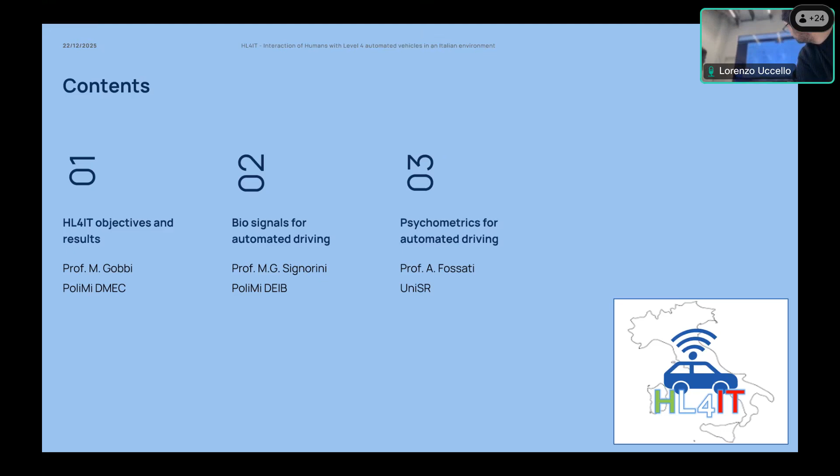First of all, the team. In this slide, you see all the people involved in this research project. There is one team from the Department of Mechanical Engineering. I'm not citing the names, but you can see all the names in the slides. Then another team from the Department of Electronics, Information and Bioengineering. And last but not least, the team from Università Vita-Salute San Raffaele, led by Professor Fossati.

Actually, almost all the activities have been conducted at the DriSMi lab, so at the dynamic driving simulator at Politecnico di Milano, with the contribution of Francesco and Paolo. I want to mention, this is the short list. Actually, there was also a quite large set of master students involved in the project, which are not listed here.

The focus of the project is obviously safety. Actually, the focus is on acceptance of automated vehicles with, again, another special focus on a peculiar environment, which is the Italian environment, that has some specific aspects related to roads, traffic, and so on. In my portion of the presentation, I give you a short overview on why reasoning on automated vehicles, what is an operational design domain, what is a takeover maneuver.

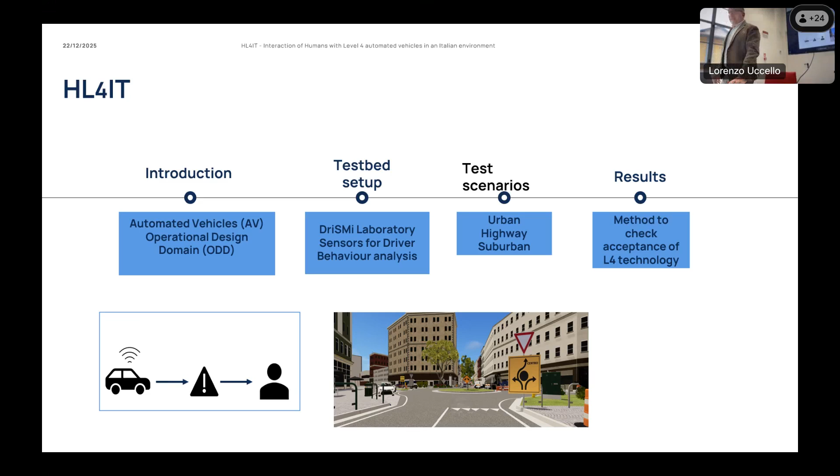Then I'll describe the setup that has been used both in terms of scenarios developed at the driving simulator and in terms of sensors and subjective measures that have been developed by the psychometrics. I'll get at the end with a few slides on the method that we have developed to check the acceptance of L4 vehicles and some results.

So the focus was to develop a standardized, rigorous approach for assessing the acceptance of this L4 vehicle. So we have been able to define how to measure, by resorting to a driving simulator, the level of acceptance referring to a sample of drivers. Actually, I must emphasize that the approach, the procedure that we have developed is actually applicable also to different technologies in which I have to consider the human within the machine, the interaction between the human and the machine. I will give you more details later.

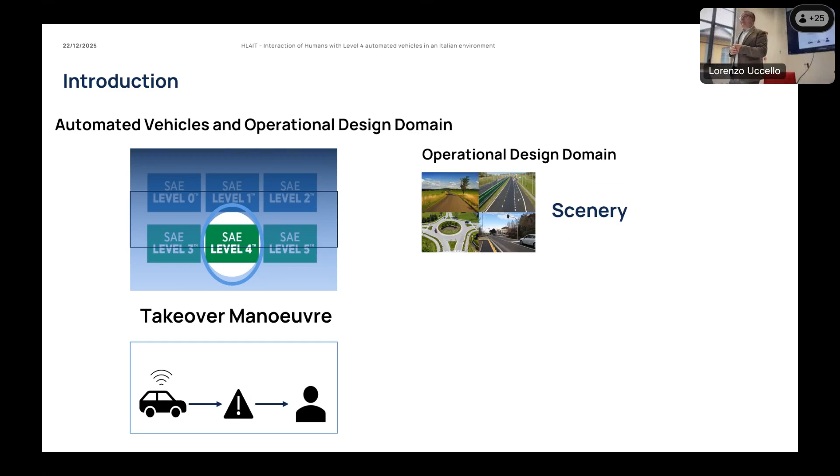Automated vehicles, SAE level 4 is the focus of this project. The dynamic driving situation is defined for a level 4 vehicle within an operational design domain. The operational design domain will be defined at the driving simulator by describing the scene, by describing all the environmental conditions, and obviously, this is particularly important for the Italian scenario, all the dynamic elements of traffic and the particular situations which have to be considered.

If we get to a situation in which we reach the limit of the operational design domain, the vehicle can require a takeover maneuver, so giving back the control to the actual driver. Actually, this is a non-mandatory situation for an L4 vehicle. So if the driver doesn't want to take the control, the vehicle will get to a minimal risk condition that depends on the actual traffic condition.

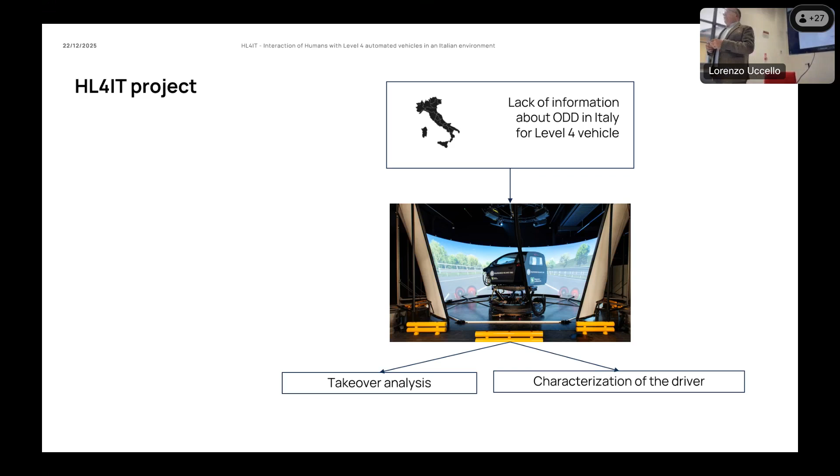We started this project by considering that there was a lack of information about operational design domains in Italy for L4 vehicles. And the information is really important for developing new rules and standards to include these features in the next few years. We will use our driving simulator. We will focus on exiting operational design domains, so we'll consider a specific takeover maneuver, and we'll try to characterize the driver, both considering objective and subjective measures.

This is the lab where we are, the key enabling technology, let's say, for this type of research activities using the driving simulator. We use our DiM400 cable-driven simulator. It features a quite large bandwidth. We have the lower portion of the simulator actuated by using cables that allows a bandwidth between 0 and 3 Hertz, and a hexapod allowing a bandwidth up to 30 Hertz, more or less. This allows us to obtain the level of realism that is required for involving a sample of drivers who are not actually professional drivers.

What about the measurements? I already emphasized some of these measures refer to responses of the vehicle, responses of the driver, behavioral responses of the driver, and to physiological signals. Okay, these are objective measures.

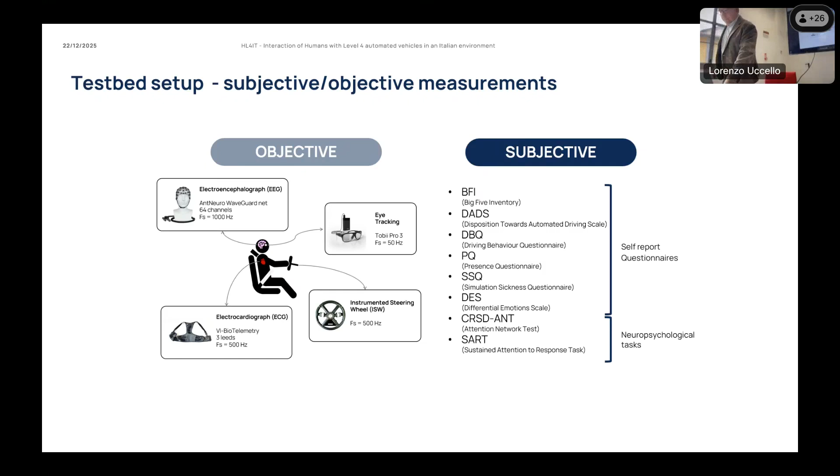And some of them are actually not questionnaires, but specific neuropsychological tasks, like the ANT test or the sustained attention to response task, the SART, that is able to quantify how the driver is able to sustain a quite long, let's say, high level of attention concentration.

These subjective measures have been measured before and after the simulation at the driving simulator. Okay, so some specific quantities have been analyzed before, others after the simulation itself. I don't have time to provide too many details.

Referring to the scenarios, we had to consider the peculiarities and the complexity, I can say, of the Italian environment. So we had to resort to different situations, okay? At the very end, we consider an urban, a highway, and a suburban environment that were able to represent quite a large set of possible critical situations.

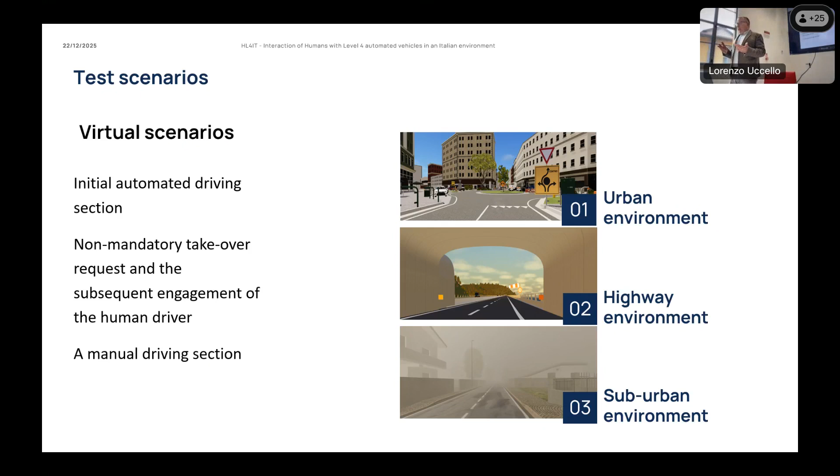In all the scenarios, we started with a few minutes of automated driving, then at a certain point with a specific triggering, there is a takeover request. Remember, the takeover request is not mandatory by considering this class of vehicle, and the subsequent engagement of the driver that gets to manual driving at the end of the simulation. A few words about the scenarios.

The urban one is characterized by the presence of a roundabout with a specific, let's say, critical situation. There are roadworks on the roundabout itself. So we had to introduce a temporary traffic light, and probably even more important, also the traffic flow that usually is counterclockwise in the roundabout, in this case was clockwise.

For this reason, the vehicle, due to the critical safety situation, requires a takeover. It allows 10 seconds to the driver to get control of the vehicle. Again, if the driver doesn't want to drive the vehicle manually, we get to this minimal risk stopping, or in this case, a stopping of the vehicle.

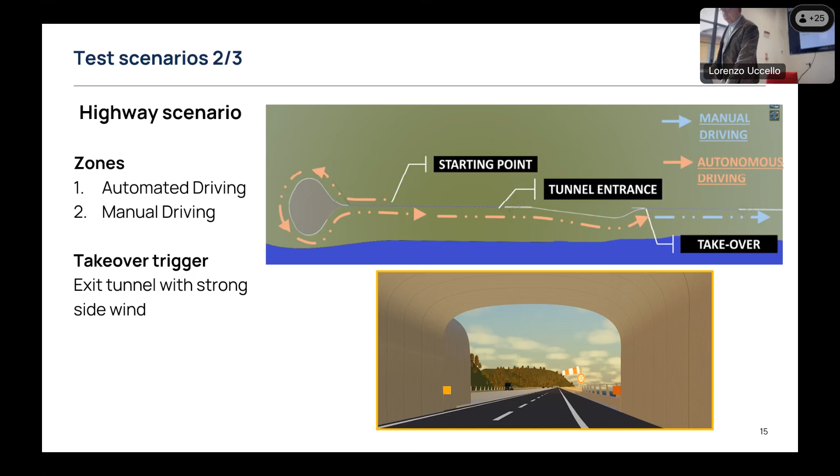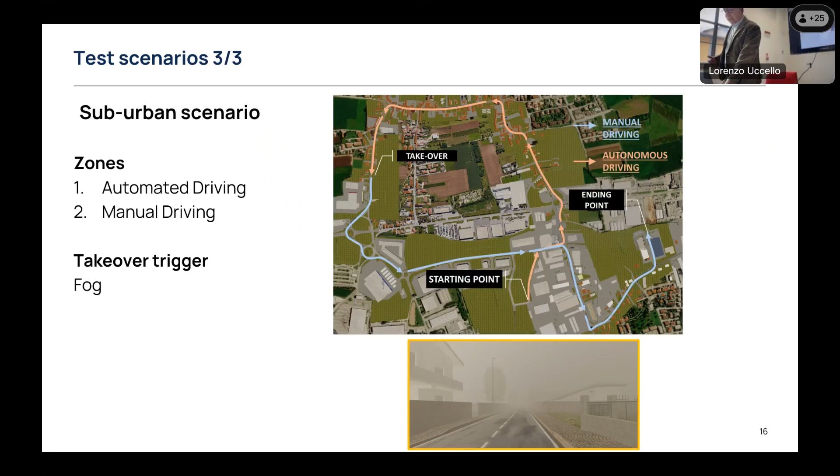Another scenario, which again is quite typical of the Italian environment, is a highway with bridges and tunnels. The triggering is a strong wind gust. Last one, the suburban scenario. This is an Italian city which has been digitalized, and the triggering event is a sudden fog that impairs some of the sensors of the vehicle.

51 drivers or passengers, we can call them with both names, students from Polimi and Università San Raffaele, so it's quite a homogeneous sample in terms of age and driving experience, but with a totally different degree.

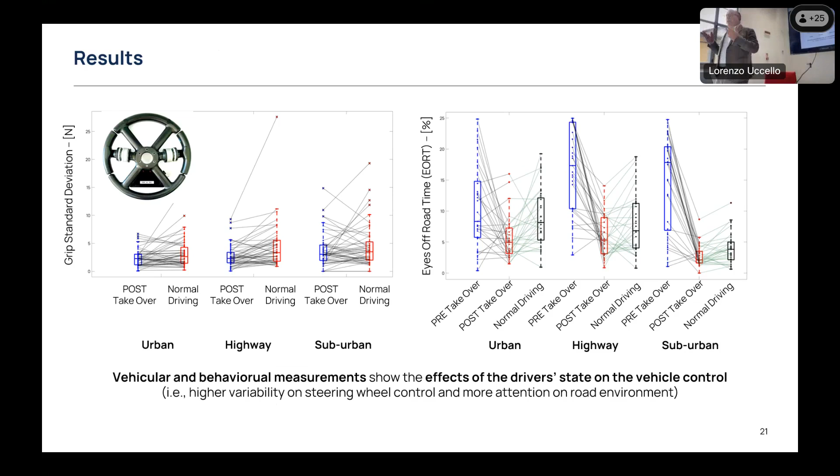Or another more behavioral, let's say, measure, which is related to eyes off-road time, shows that the minimum value refers to the post-takeover situation. Probably it's quite obvious because during the post-takeover maneuver, I have a higher workload of the driver that has to manage the vehicle itself.

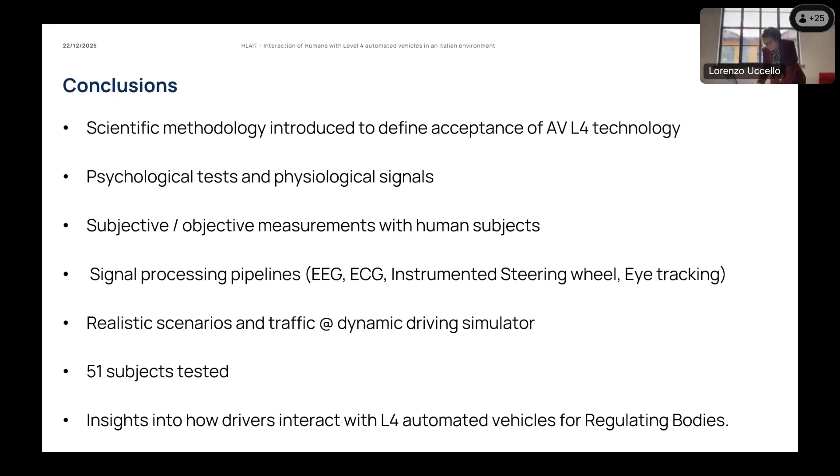It's a pleasure to be here and to present this part of the project, which is, as Max already introduced, the cooperation among different components in engineering, mechanical engineering, biomedical engineering, and psychologists, to face a complex problem. That is the interesting point in this.

It is the interesting point of this work, such as answering some technical questions about the measurement of the reactions of human subjects exposed to scenarios of autonomous drive. And to do this, we, as bioengineers, have been involved in order to measure some physiological reactions by measuring some biomedical signals.

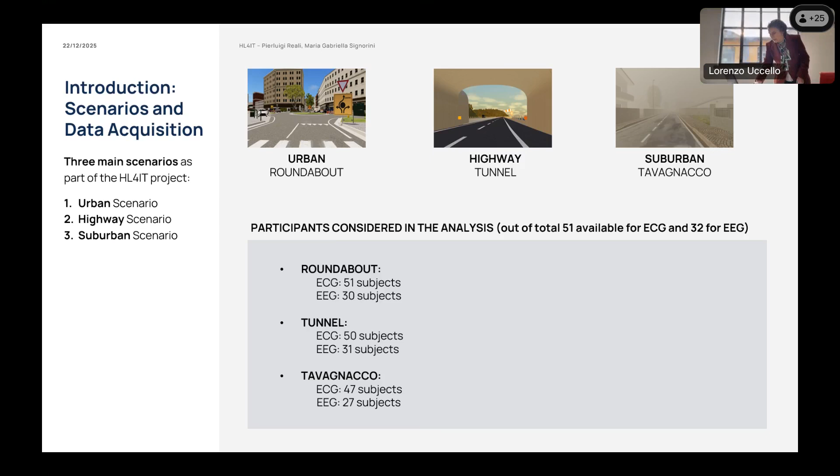And we started with a measurement of a signal that is particularly sensitive to changes in human subjects in many other conditions, which is the ECG signal. The reason why we decided to start with this signal is its simplicity. It is not simple to acquire in all conditions, but basically it is one of the simple signals that can be measured.

But we decided to go to a complex monitoring setting. And in this complex monitoring setting, the EEG signal, electroencephalographic signal, was also collected and analyzed, as well as the eye tracking, the measurement of the activity of the eyes during the autonomous drive, and the grip forces during driving. So this is a brief overview of why and which are the main results, partially summarized in the introduction by Max, whom I thank for this.

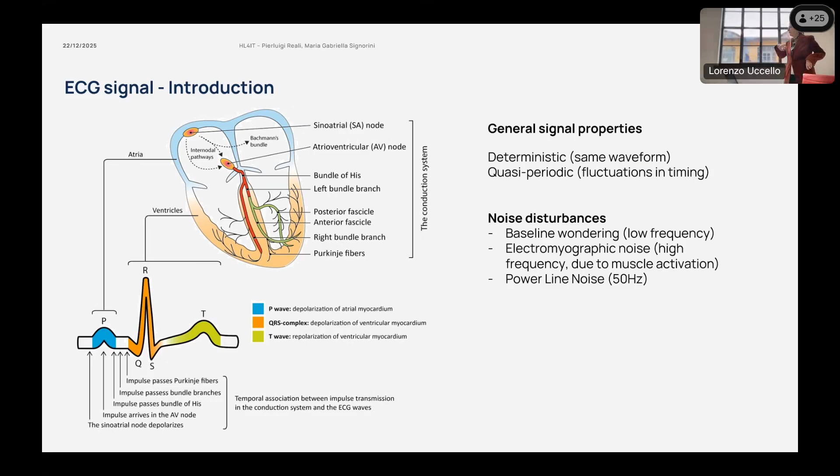The information here is that the heart beats in a regular way, but the beats are not equal to each other. They do not repeat themselves in an exact way. They change physiologically, and this physiological behavior is regulated by the autonomic nervous system, which is associated with emotional stress states. And so this measurement provides indirect, not quantitative, information about the functioning of the autonomic nervous system, and it allows us to obtain information about the emotional involvement of the subjects.

And this is the reason for a pipeline recognizing the peaks of the ECG activity, taking the higher value. These peaks, the QRS peaks, correspond to the ventricular contraction, the generation of the beat.

And this signal is controlled. You see, the signal isn't regular. It oscillates inside a certain set of values, and these oscillations, analyzed in the frequency domain or in other domains, can provide indication about what is going on with the autonomic nervous system of the subject that we are considering. So we concentrate on this signal, and we try to extract the contribution that can be associated to

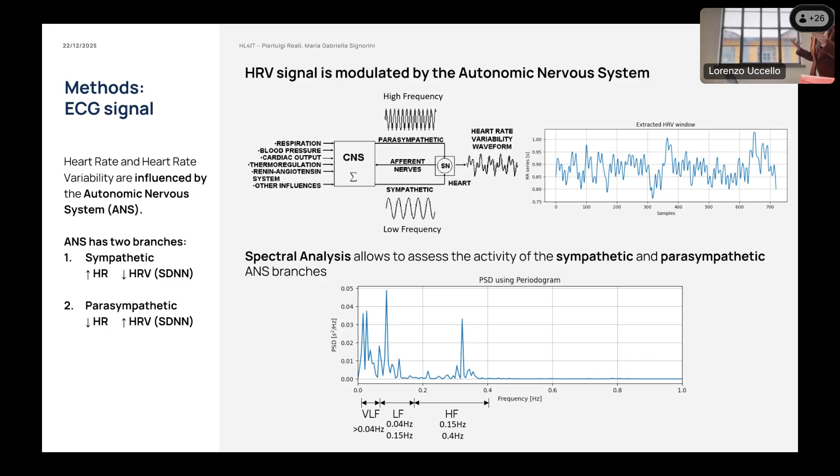And this balance characterizes this control. So even in our subjects, these measurements have been done, extracting information about the prevalence of one or the other branch of the autonomic nervous system that controls the heart. It's a complex monitoring, and we consider parameters, and this is a key point, not only in the frequency domain, but in the time domain, parameters directly measured in time, and even nonlinear analysis.

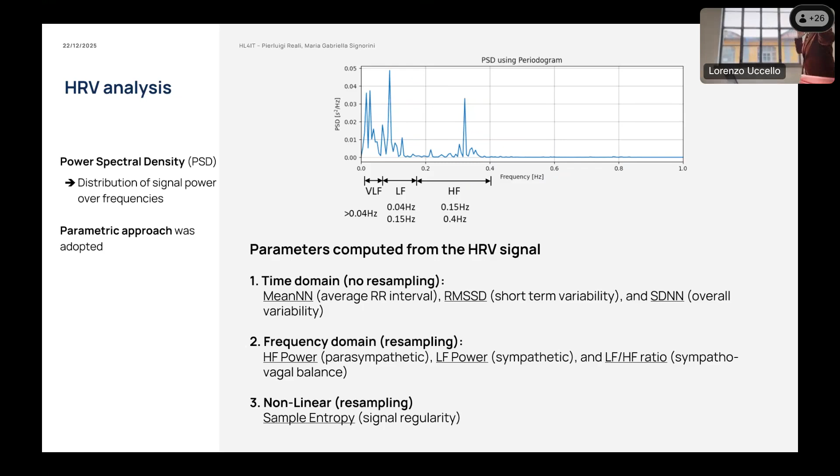So why nonlinear? Because the contribution given by the signals is not made only by linear components that can be explained by linear methods, but even by nonlinear components. No single parameter exists explaining everything. We need a set of parameters, and this is the approach that we have used to analyze this signal.

Why? Because the subject perceives a certain amount of stress taking control of the car when the car asks to do it. So these are results obtained on the different parameters we calculate: takeover, pre-post, and normal driving. And the message is summarized here. It's a bit difficult to catch the point in this short time.

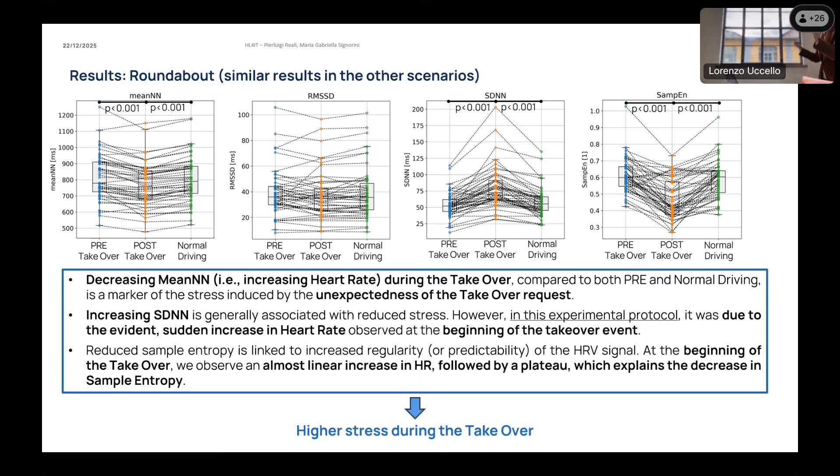The point is that decreasing the mean duration of the beat, so increasing the heart rate during the takeover, can be generated by the unexpectedness of the takeover request. The subject is surprised by this request, and reacts in this way. And the changes affect all parameters, not only heart rate, not only frequency domain, but also entropy, such as nonlinear parameters. So all features contributed to these changes.

Moving to EEG, things become more complex, and the pipeline implemented needs to introduce filtering and some steps. Here we have Luca and Pierluigi, who are experts on this.

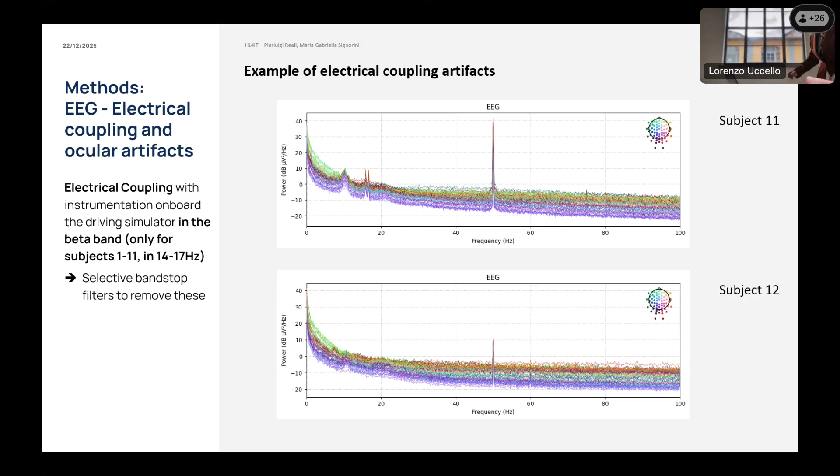The point is to remove noise. Otherwise, it's quite impossible to extract information that's inside that signal, but it needs to be enhanced by these steps. For instance, this is an artifact that needs to be removed in order to analyze the signal correctly, and disturbances generated by eye activity can affect the signal and need to be removed too.

What we calculate, what we extract, are components, linear harmonic components that are inside the EEG signal. It's impossible to recognize them without filtering and processing, but those components can be used to quantify the effect of this signal during the different stages of the autonomous driving.

One of the results obtained is that participants were more relaxed during the other two phases than during the takeover. So it means that if the subject is not surprised by what arrives, he is more relaxed. This opens to the conclusion that we have to prepare our subjects, maybe through activities that can prepare them for the experience they will have once exposed to autonomous driving.

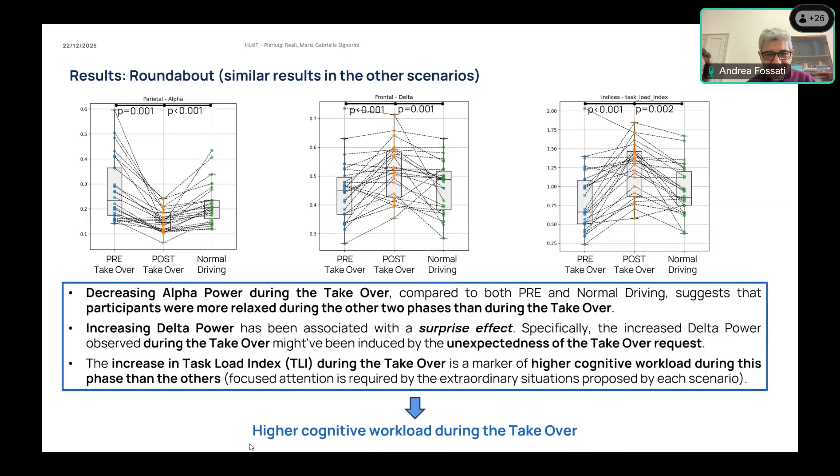I should be able to load and share the presentation now. Well, now I'm... this is too difficult and complicated for me. Okay, that's it, that's the slide.

Well, Dr. Leda Mastinu and Dr. Antonella Somma should be credited for being the actual developers of this measure, the DADS. When we tried to figure out how to develop a measure for testing subjects' acceptance of automated driving, particularly during the driving simulation...

We faced a huge heterogeneity in the empirical literature, ranging from people trying to derive the driver's disposition towards automatic vehicles from baseline characteristics, background characteristics of the driver, like gender, age, school level, wealth, style of driving, say angry driving or fast driving, and ethical perspectives on driving, like always respecting the driving code, and so on.

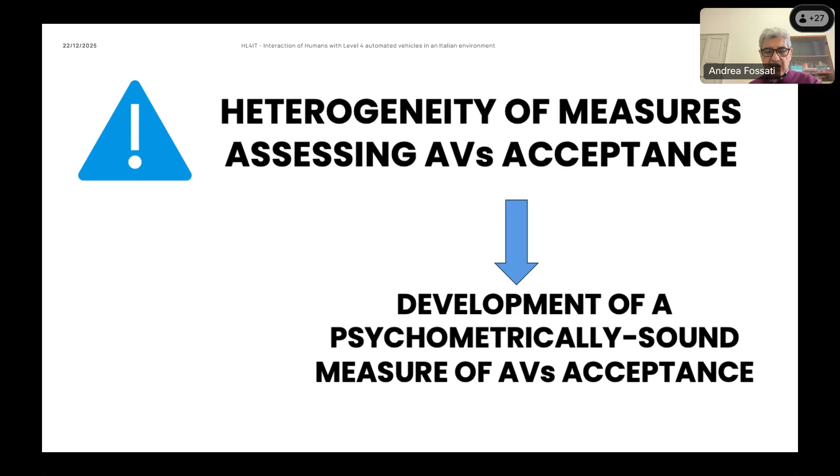These items measured basically 5 major dimensions of disposition towards automated vehicles: perceived safety, need for control during the driving experience, ease of use of the automatic vehicle, driving pleasure, and how the driver felt while sharing roads with automatic vehicles and traditional vehicles, which was also part of our simulation scenarios.

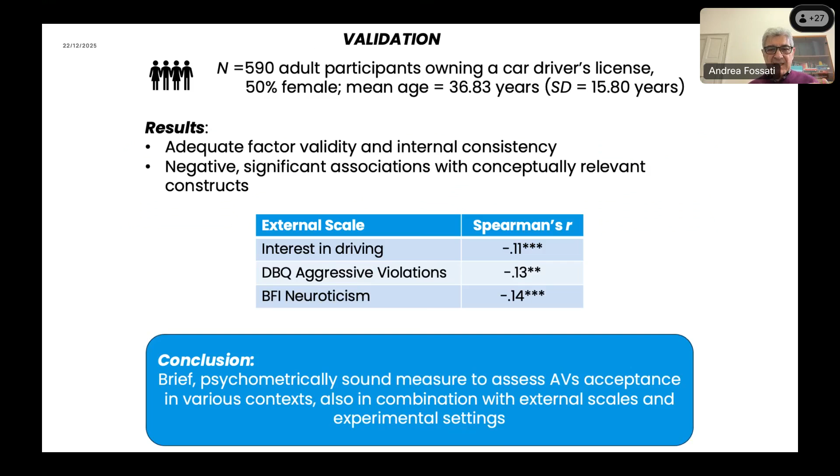This measure— okay, next slide please. No, the slide before. One slide before, please. Just not before, and one slide before.

Okay. This measure was assessed as a psychometric measure in the first sample of 590 adults with driving experience.

Just to provide preliminary evidence of the score distribution, developing Italian norms, providing evidence for its factor structure. We thought the scale is a unidimensional measure. I mean, all the items were supposed to measure one and only one thing, in particular, disposition towards automated vehicles.

And score reliability, in a sense the degree of expected reproducibility of the score over, say hypothetically, an infinite number of testings of the same subjects.

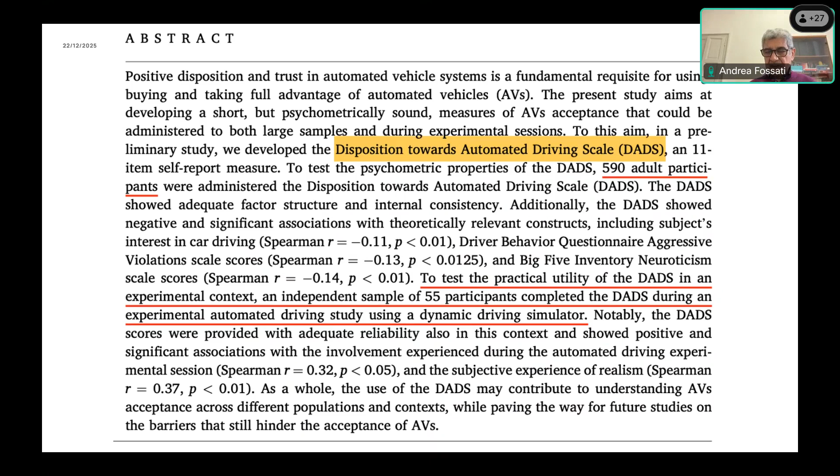And the DADS total score, as we expected, was correlated with both the degree of involvement experienced by our participants during the experimental session on the driving simulator, as well as with the subjective experience of realism experienced by our participants during the driving simulation session.

Finally, and that's the last slide, pre-test, post-test analysis. Perfect, thank you Lorenzo. Thank you very much.

Pre-test, post-test analysis showed that the experimental manipulation, say the simulation experience, definitively increased—significantly as well as non-negligibly—the subject acceptance of automated driving, in line with our hypotheses and predictions.

Having said this, I thank you again for the attention, and thank you very much. Thank you.

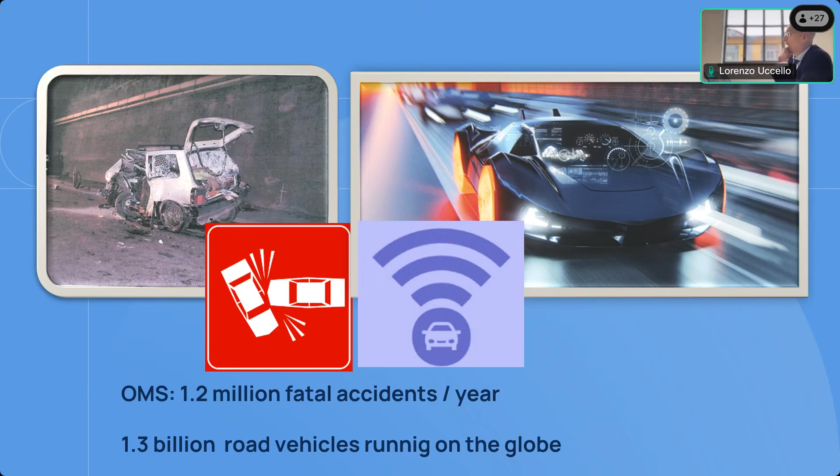Despite these huge figures, we are still not understanding how the driver loses control of the car, how the driver manages to control the car in case of an edge maneuver.

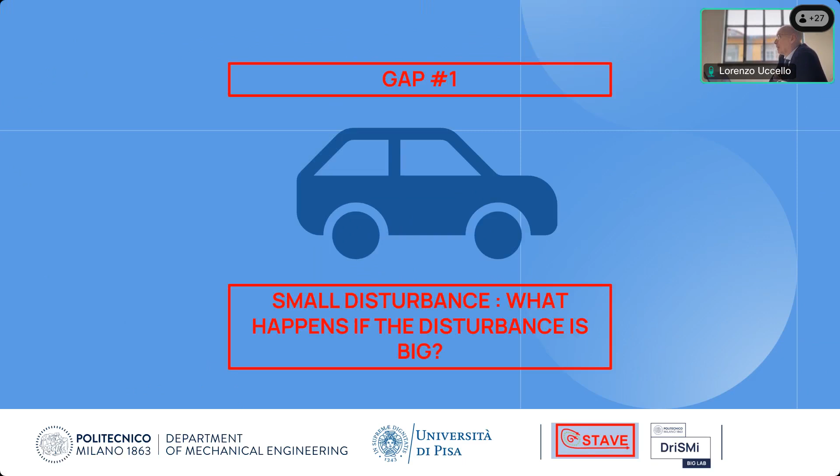Which are the gaps? The gaps refer to the current education in stability and handling. Actually, we instruct our engineers that stability refers to small disturbances, but usually we have big disturbances, especially before an accident is occurring.

And the other gap that has to be covered is that usually we teach our engineers to study the stability of vehicle only, but the stability is the stability of vehicle plus driver. So the question is how drivers lose control of the car.

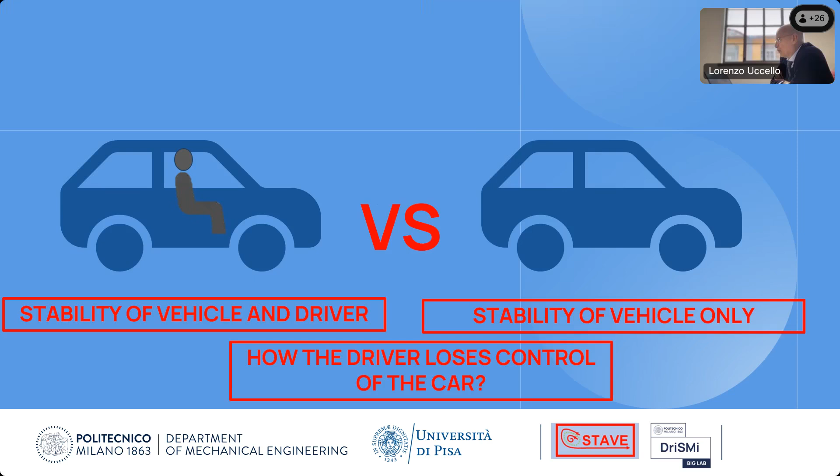We have actually issued a publication on this that has been cited many times in the US, and actually this is one of the results that we will present today.

So coming to the objectives of our project, we have three objectives. The first objective is to define digital twins of the vehicle in order to use them in a driving simulator and understand how human drivers lose control of the car.

Use a dedicated and proper mathematical description of what's going on, and actually use bifurcation theory, that is the proper theory that should be used in order to understand how drivers lose control.

Applying this theory to our case, and finally resort to regulating bodies with objective 3, that is actually influencing how stability is studied and how engineers have to focus on the actual and important problems related to stability.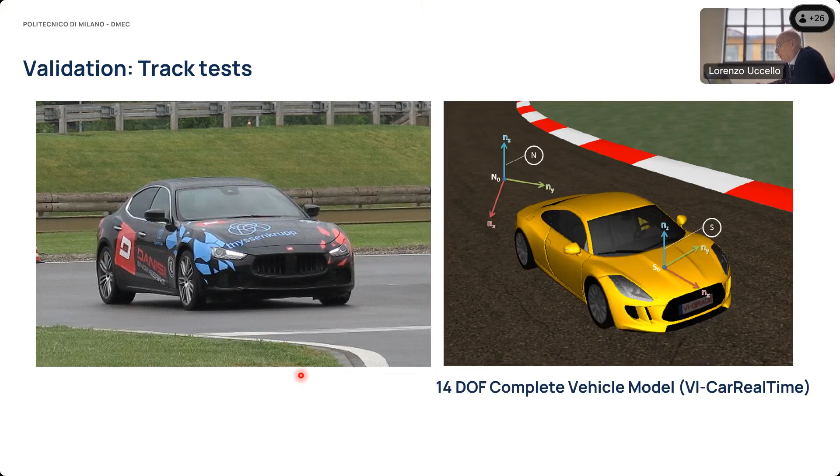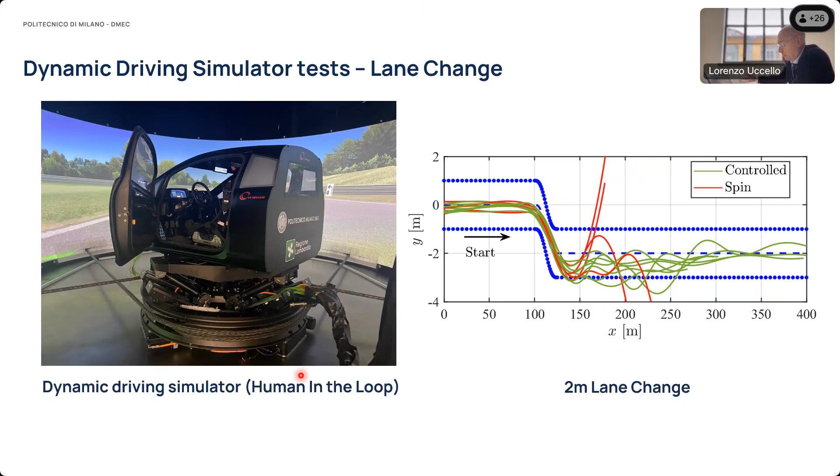And then we used those models at the driving simulator to better understand how the drivers interact with the car. We did several maneuvers, like, for example, you see the lane change. So the deliverables have been produced and are available, open, on our website.

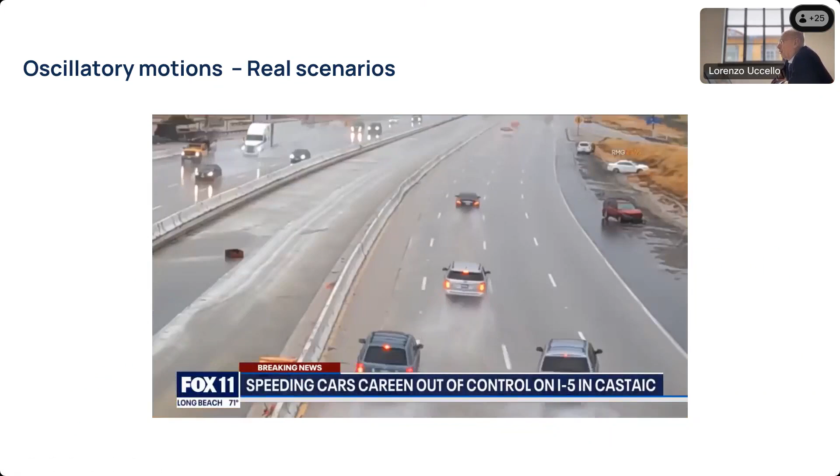Referring to objective 2, we have focused the attention of the scientific community on the fact that normally the behavior of the driver plus the car is oscillatory. Actually, the drivers in edge cases are actually driving the car, and overall the motion is oscillatory. This is, I would say, easy to be seen and understood from this movie.

The fact behind is that there are limit cycles that will have to be understood as being core concepts for actually designing new vehicles. Limit cycles are very much related to safety, but also efficiency and comfort.

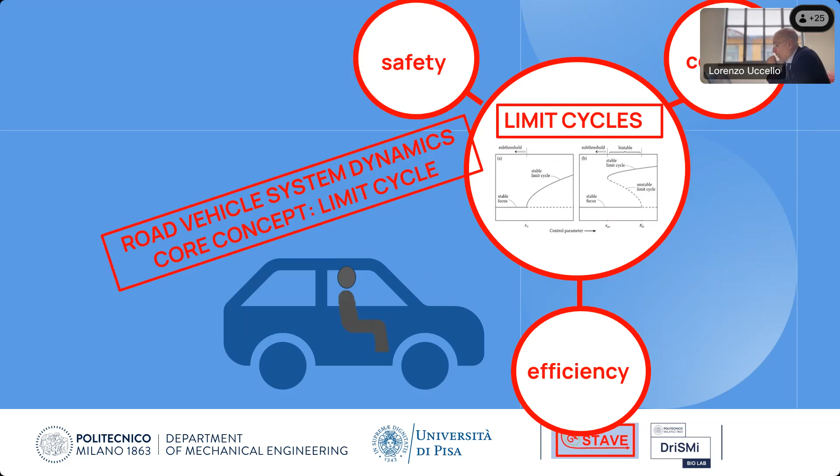Our colleague will get into details on this topic. Let me go ahead - referring to the third objective, which is regulation.

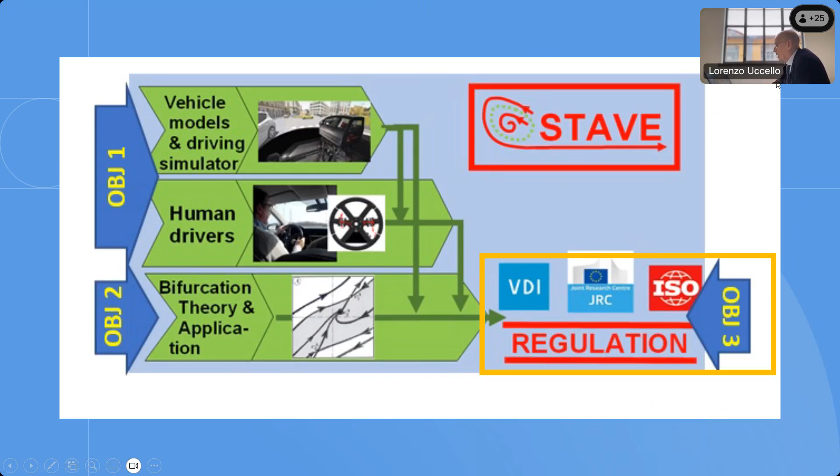We have issued a report, as I said, which criticizes ISO 8855, and another one is being issued referring to regulation 157 that refers to the automated driving of level 3 cars.

Of course, in the project, we have also focused on communication, exploitation, outreach. We had a number of YouTube videos and webinars devoted to the public bodies. We wrote 20 papers, 8 on international journals, and more are being submitted and will come after the project has been finished.

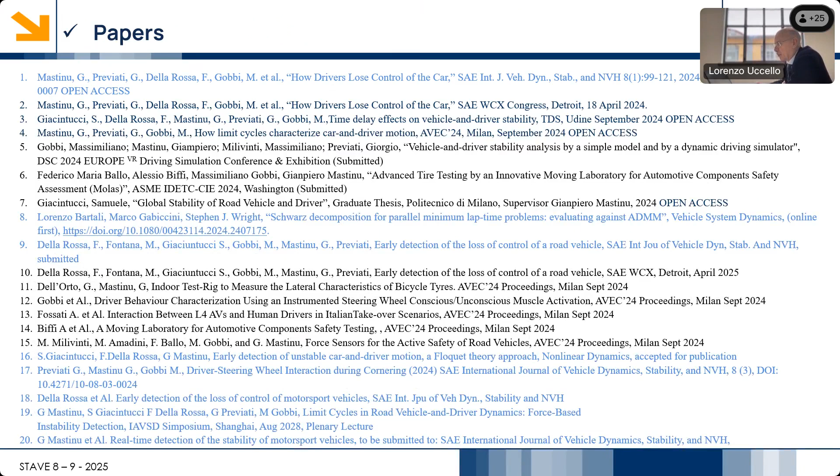We had also other outreach activities. We are particularly proud to have involved high school students, who had a first and basic explanation of how drivers may lose control, for their early understanding of safety issues related to vehicles.

The deliverables are at our website within the Driving Simulator website. And now I leave the floor to my colleague Fabio Della Rossa, who will get into more details referring to stability of vehicle and driver.

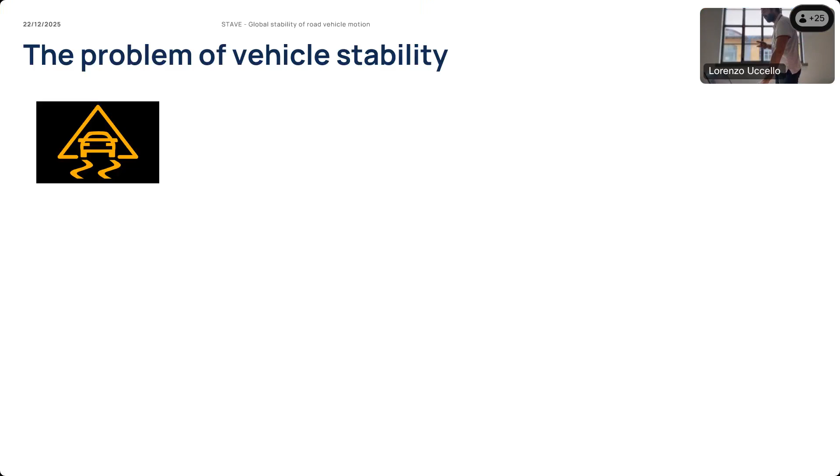Yes, effectively, I go deep in what Giampiero presented as objective 2: the problem of vehicle stability. Giampiero already told us that it is a problem that has been studied in a huge way. Just by chance, while I was preparing the slide, I thought, let's see how many papers contain the words vehicle stability. And there are more than 50,000 papers that have vehicle stability in the title. So it's a very well studied problem, and it has also been normed, as Giampiero said, and he was also saying that not all those papers are useful.

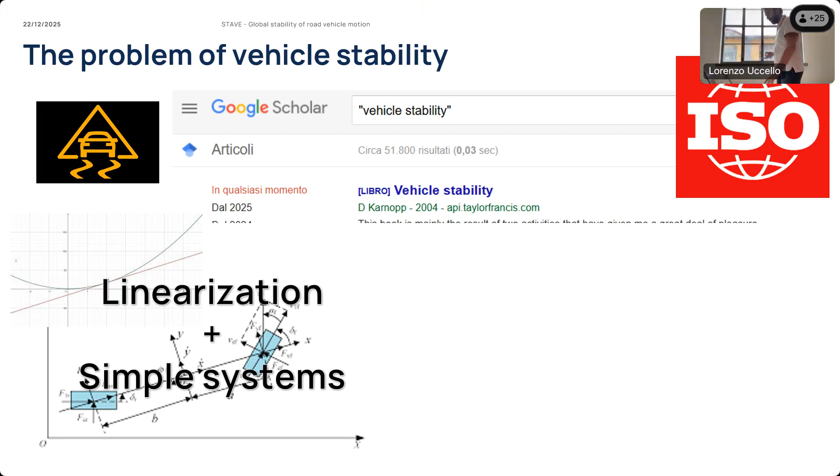And why are they not all very useful? Because, as Giampiero said, normally when we study vehicle stability, we use an approach that is based on linearization and simple systems. And this is what we teach also in our university. Take a very simple model, look at its linear version, or take the direct linear model, and what you obtain at the end is the great truth that every mechanical engineer knows, and that is written even in the norms, in legal norms. That is, if you have a vehicle that is oversteering, it's bad. If you have a vehicle that's understeering, everything is fine. You are sure that everything will go fine.

And this truth has two main problems, two limits that Giampiero already told us. The first one is that since it's based on linearization, it is true locally. So just for very small disturbances. I could say that I'm a mathematician, a mathematical engineer, and so the disturbance is infinitesimal. But normally disturbances are not infinitesimal. They can be very big, like a wind gust or a maneuver that we have to do in order to avoid an obstacle. And so these disturbances are not covered by linearization.

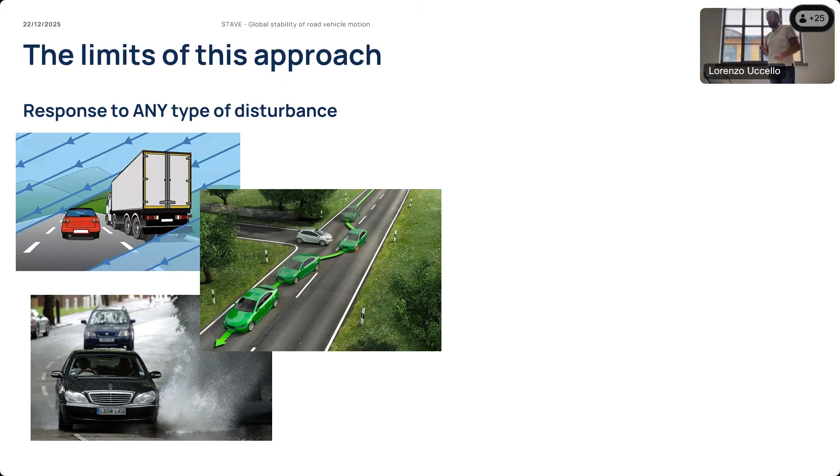And second, in my opinion the most important part, is that the fact that the vehicle is stable does not mean that a vehicle follows a certain path. Normally, I want to go in that direction, and after a disturbance I start going in this direction. Okay, stability and path following are two different concepts that cannot be treated separately. And this is where the STAVE project starts.

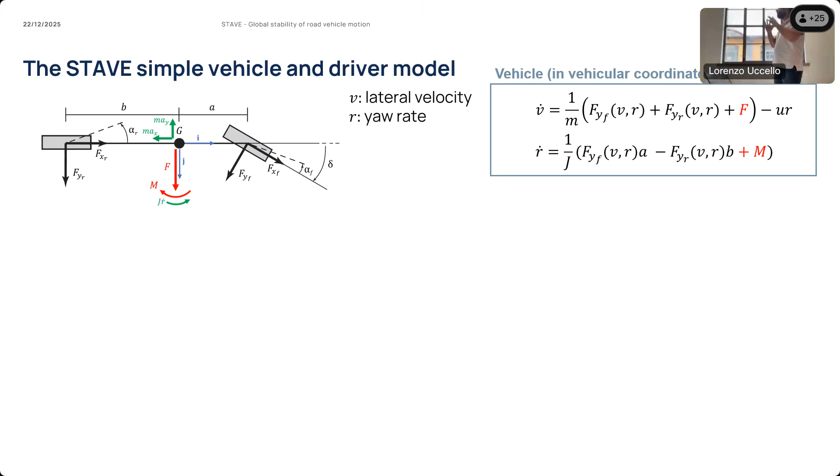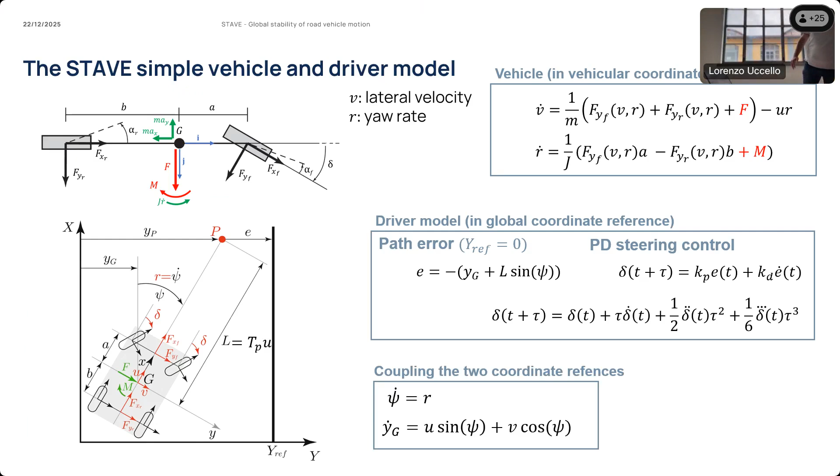The idea is, okay, take the very simple model. We do not need a harsh model in order to find our result. But don't use it alone. First of all, remember that the vehicle has a path that you have to follow. And so couple it, study a simple model in which there is at least the scope of this vehicle, that is following a path, even a very simple path, even a straight path. So study these two models coupled together. If we study the two models together, the hard model that we have to study, and it is hard because we pass from two equations, a very simple model, to 4, let's say 6, 7 equations, is the following.

This is the simple model that we have studied in order to try to understand how drivers and cars work together in order to follow a path. And this model was not sufficient to make a convincing argument that we were not saying just pure mathematics. But the idea of the STAVE project is to find things in this model, the simplest model you can use that has inside both how the vehicle works and how the driver works, together with an experimental validation that has been done just after this door, I guess, if I'm correct.

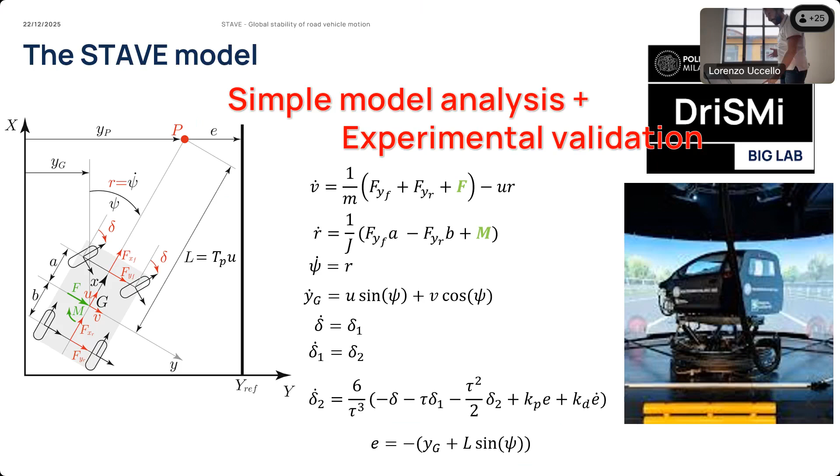So let's start with the very first result that we were proud of, which is in that article whose title is "How Drivers Lose Control of a Car." That is done just looking at the linear analysis of this model, in which there are both the driver and the vehicle together. So we are not coping with the problem of big disturbances. Let's talk about infinitesimal disturbances. And if we look at this linearized model that couples both driver and vehicle, the state 0 is the state that we want; if it is stable, it means that we are able to follow a straight path.

But what we obtain is that analytically, for this model, we can prove that there is always a speed for which this equilibrium of the vehicle plus driver system is not stable anymore. This means that independently of whether the vehicle one is driving is understeering or oversteering, if you go sufficiently fast, you cannot drive it. But if you go to a pub and drink a beer, you can say, okay, if I'm going 600 kilometers per hour, I don't think I'm able to follow a straight path. It's nothing strange. We have proven it analytically and mathematically, and here is where bifurcation theory enters.

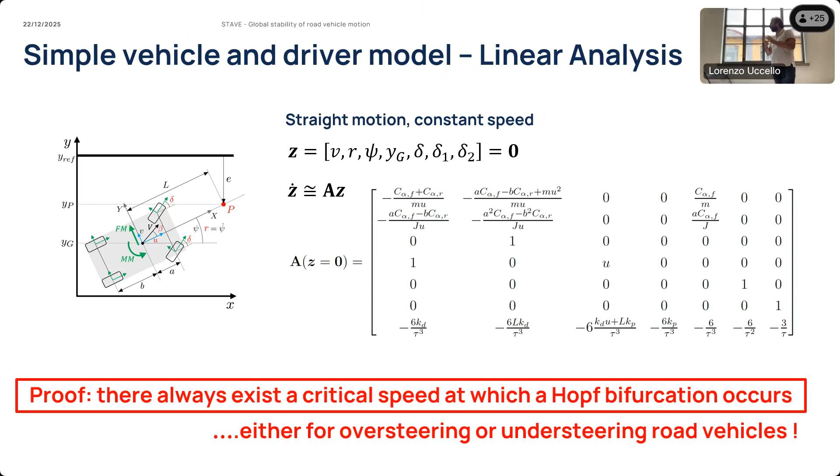We have proven that when stability is lost, there is a Hopf bifurcation. That means that there is a limit cycle that is involved in this bifurcation. Here I have the picture of the two possible scenarios that happen. Here you see there is this green line, this equilibrium for different forward velocities, that at a certain point becomes red. And that means that there is a stable equilibrium here at 80 kilometers per hour. I can follow my path. Here at 140 kilometers per hour, I cannot follow it anymore because it is unstable.

And what happens when stability is lost? There is a limit cycle, which can be either stable or unstable, that shrinks. That starts with a very, very small amplitude and, if it is stable, generates small oscillations as a possible behavior, or if it is unstable, just causes the loss of stability of this. These are the two possible scenarios. Through this limit cycle, you see, those are the two possible features that one has.

So this is called subcritical Hopf bifurcation, where there is this unstable limit cycle, and there is the supercritical Hopf bifurcation when there is the stable limit cycle. What we have seen is that even in the case of the supercritical bifurcation, you are going forward and increase speed, you start making small oscillations, and then the oscillations increase. After a certain point, this asymptotic behavior of the system, having very big oscillations, becomes unstable too.

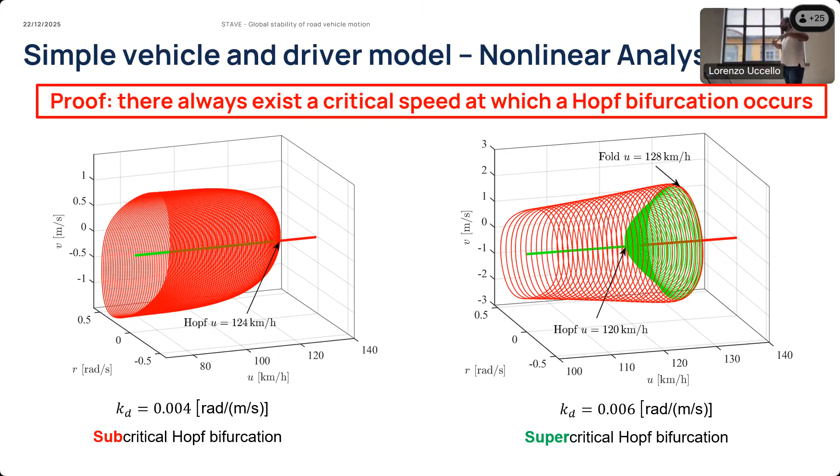And so in both of these cases, there is an unstable limit cycle. And this was the limit cycle that Giampiero was talking about before. That is a limit cycle of saddle type. What does saddle type mean? It has some directions that go toward the limit cycle and some directions in which you are repelled from the limit cycle. The saddle effect is this one. So think of this equilibrium as a saddle. There are trajectories where, with a certain initial position of your ball and a certain velocity, you can exactly stop on the top of this hill, and this is the stable direction of this saddle.

Otherwise, if you are not in this case, you can reach almost the saddle, the equilibrium, but at a certain point it starts the other direction in which you diverge from the saddle, and so your ball goes away. Why are saddles important in system theory? Because saddles, with their stable manifold, divide the basins of attraction of different stable equilibria, stable ways of working. So if, in this figure, I have two ways my system can work, the ball stays on the left part or the right part, the saddle and all the trajectories that stop exactly at the saddle divide the initial conditions for which my ball will stop here from those for which it stops on the other side.

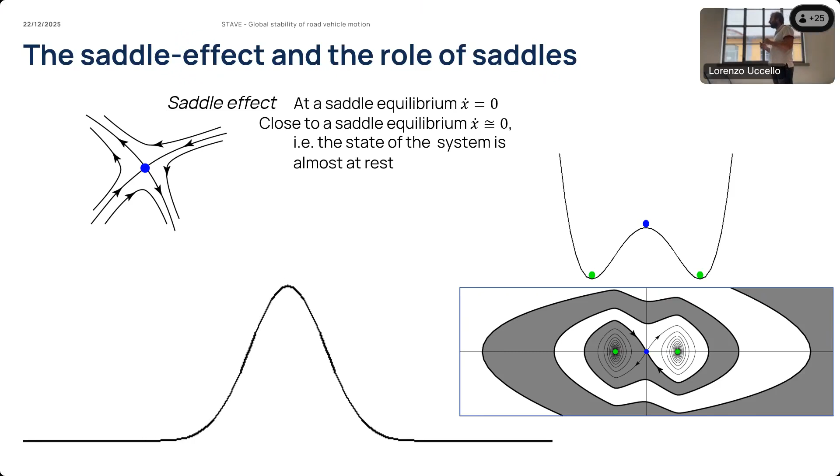This is why saddles are important, and our saddle limit cycle does exactly the same work. So this is the limit cycle. The limit cycle has a trajectory that goes spiraling. This green cone goes to the limit cycle, and this is its stable manifold. While this other has another trajectory that spirals out from the limit cycle. That means that it goes to the limit cycle if I go backward in time. This is the idea of the unstable manifold.

Those are the two unique trajectories. So all the trajectories that start in one of the points of these cones are the trajectories that go to the limit cycle forward or backward in time. All the others, just as for the ball before, approach the limit cycle and then go away.

And what I was saying before, that the stable manifold of a saddle is what divides the basin of attraction. And then also here we have a stable manifold of a saddle limit cycle, that is this green surface, and all the points that are in the green surface at the end will reach this equilibrium. All the points that are outside this green surface approach the limit cycle and then go away. This is how the system works theoretically.

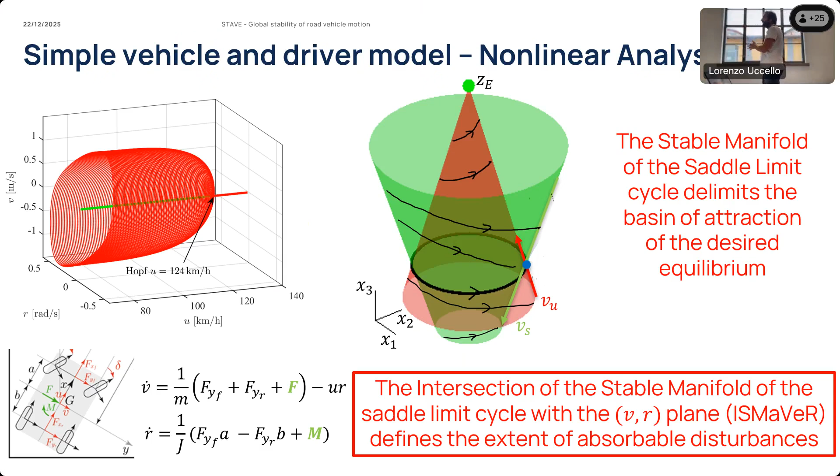And obviously this was not sufficient. This was the video before. We have to say, okay, this is mathematics. Is it true? And we have tried to make an experimental validation. The first question was, does this saddle limit cycle exist? Does this trajectory exist that you approach and then you avoid?

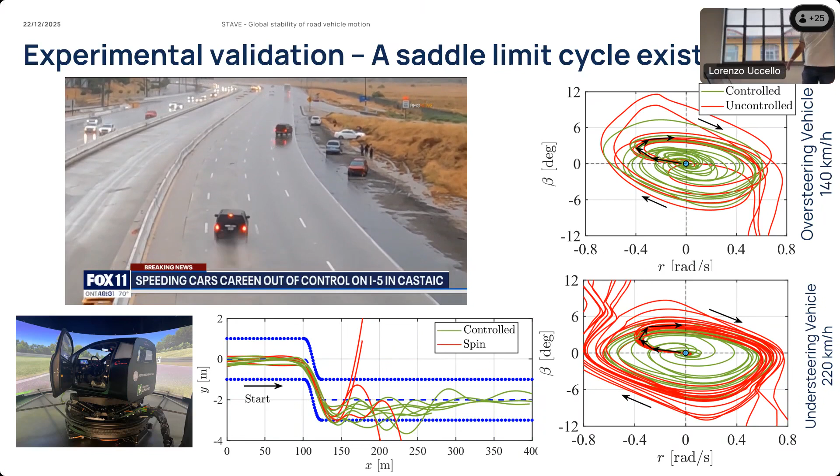And here, this is the video that Giampiero showed you before, in which you effectively see these oscillations that vehicle plus driver does. And we have also found in the simulator trajectories that make many loops around what seems a closed trajectory. And these, we say, experimentally validate the existence of a limit cycle.

And this was interesting, the fact that if you want to do these experiments, we can do it only with a simulator, because obviously you cannot ask. We have tried. Once we went to Rome, and we asked a pilot, okay, we have to find a limit cycle, so you should try to steer and stay on a trajectory and oscillate. He said no, simply no, we cannot do that. While in the simulator we have done it, more or less.

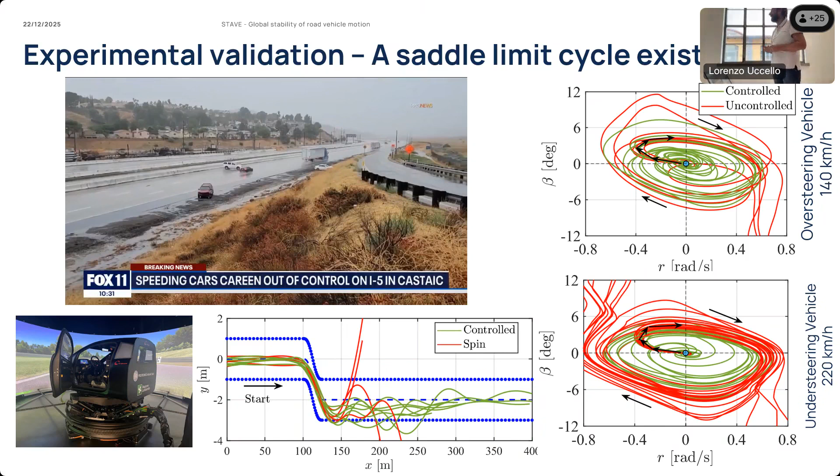And the second fact that we have said: there is a limit cycle, and the intersection of the stable manifold of the limit cycle with the v-r plane delimits the basin of attraction. We have tested it by giving the simulator some initial conditions that were in the neighborhood of the intersection of the stable manifold of the limit cycle with the v-r plane. And this boundary was computed using the simple model, the seventh-order model, with the parameters that were tuned both for the vehicle and for the driver.

And what we have found is that effectively, if the disturbances were much smaller than this boundary, the drivers were able to absorb, to go straight after starting from this initial condition. If they were bigger, they could not. Those are the meaning of the red and green dots here. And exactly where we expected with our simple analysis, the situation was a bit fuzzy. In some cases it goes in one direction, in other cases in the other one. We have found this fact even experimentally.

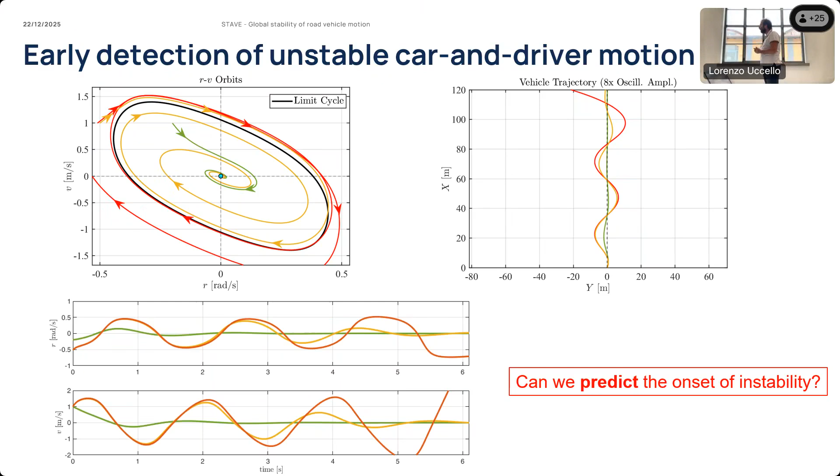Can we distinguish them? We have tried to use this idea to understand if we are inside or outside the stable manifold of the limit cycle. And this is done using Floquet theory. The idea is, okay, you take a point and you project this point into a new coordinate system in which you can easily measure if you are on one side or the other side of this surface.

And at least numerically, this is done only numerically, we have not done it experimentally yet, what we have seen is that we are able, using this change of coordinates, to detect if a trajectory will go toward the equilibrium or will go away from the equilibrium, even when the two trajectories are very similar to each other. And we also made a comparison.

My name is Marco Gabiccini, and with Professor Guiggiani, we have coordinated the team from the University of Pisa regarding the activities within the STAVE project. I would like to quickly also present our team. The team is made by PhD students: Martino Gulisano, who is going to deliver a presentation after me, Matteo Mazzoni, Vincenzo Palermo, and of course Professor Massimo Guiggiani is connected and on camera.

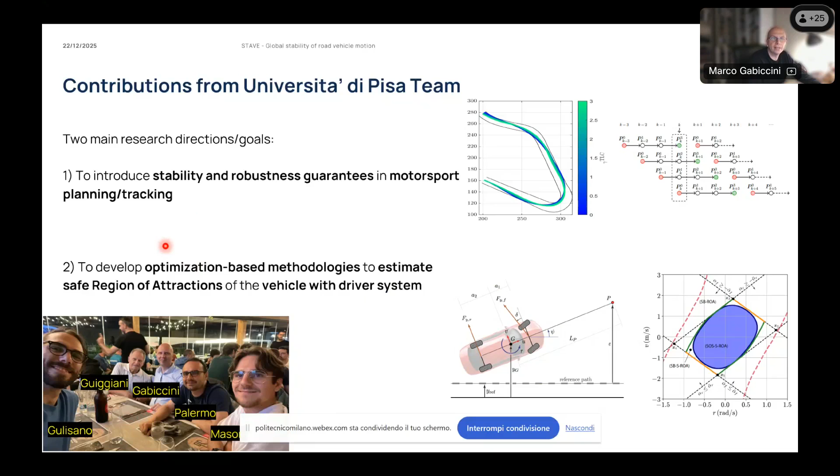I would like to give a very quick glimpse of the main research directions of our team. The first topic that we studied was to introduce stability and robustness guarantees in motorsport planning and tracking. And we have also developed some optimization-based methodologies to estimate safe regions of attraction of the vehicle with driver system, along the same line presented by Fabio Della Rossa just before. But I will leave the second topic to Martino, and I will just give you a couple of hints about what we have done regarding stability and robustness in motorsport planning and tracking.

In this work, we have studied how robust and disturbance-aware reference trajectories can affect real driving performance when they are followed by professional drivers. So what do we mean by that? Trajectories come from a planning framework where uncertainty is explicitly propagated and used to tighten the constraints, while we keep lap time as the main objective. And we compare 3 reference trajectories: a nominal one, a trajectory robust with respect to track limits, and one robust with respect to friction limits.

We also performed experimental tests on this topic in collaboration with the group from Politecnico di Milano, guided by Giampiero, within the DriSMi simulator. So 2 almost professional drivers drive a high-performance car in a simulator environment. We measure lap time and steering effort to understand the trade-off between speed and control. So the main result is simple.

Faster trajectories require more steering effort, but robustness basically changes this balance. Okay, so the main takeaway is that nominal trajectories are the fastest, but are the most demanding in terms of effort. The friction robust trajectory achieves almost the same lap time as the nominal, but with much lower steering effort. And driving without reference is both slower and less efficient.

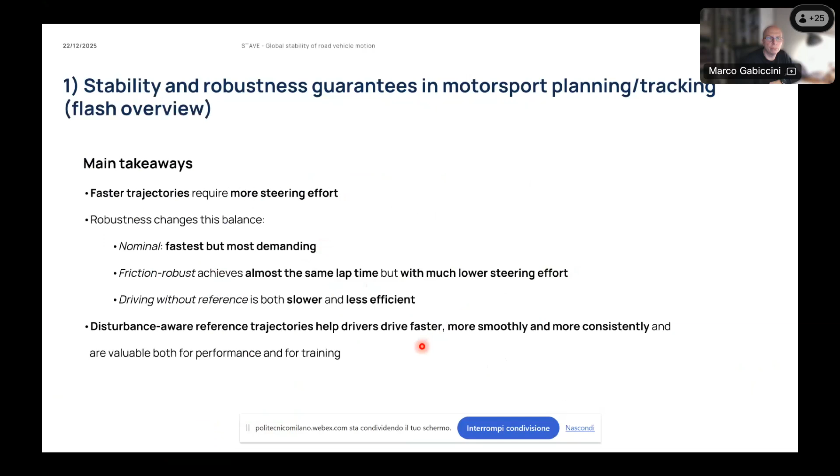So basically, the main takeaway is that disturbance-aware reference trajectories help drivers to drive faster, more smoothly, and more consistently. And we think we have proved that they are valuable both for performance and for training.

Hello, everybody. I'll try to share my screen. I can't share content unless the host or co-host makes you the presenter. Ti diamo arriva. Yeah, grazie. You could start, I think, Martino. Try to share. Optimize. Text and images. Okay. Share. Entire screen. Okay, so. Okay, can you confirm that you see my screen? Yes. Okay, thank you.

Yes. So, thank you. I am Martino Gulisano from Università di Pisa, and in this last talk, I'll present our research on sum of squares certificates for vehicle global stability assessment. By global stability, we refer to the combined behavior of the vehicle with the driver together, and here we study the simple vehicle with driver model that Professor Della Rossa has already clearly explained to us.

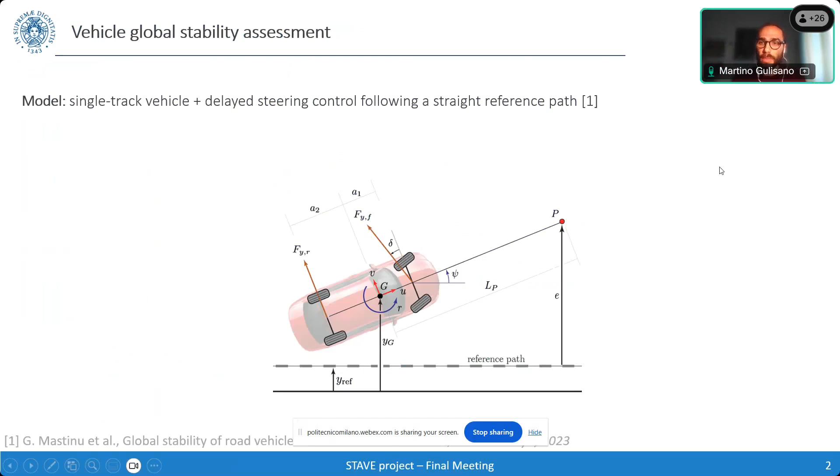And our aim is to answer this question. So after sufficiently large disturbances, for example, after a strong wind gust or after a rapid emergency lane change, the driver may not be able to bring the vehicle back to the reference path. And so our goal is to quantify how large a deviation the driver can still handle safely.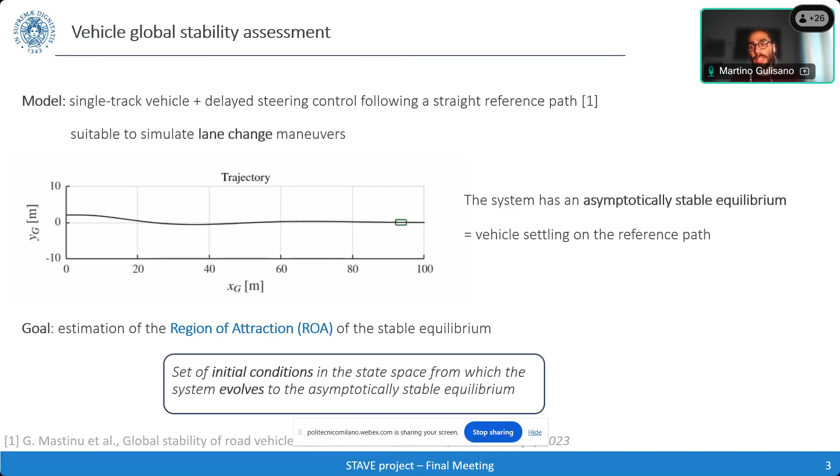In other words, we want to estimate the region of attraction, the basin of attraction of this stable equilibrium, which is the set of initial conditions in the state space from which the system evolves to the asymptotically stable equilibrium. In control theory, this set is defined as the region of attraction.

We start from a very simple benchmark system because it allows us to explain more clearly and to visualize the theory, because it is two-dimensional. And this system is the time reversed van der Pol oscillator, and it has an asymptotically stable equilibrium at the origin, and an unstable limit cycle.

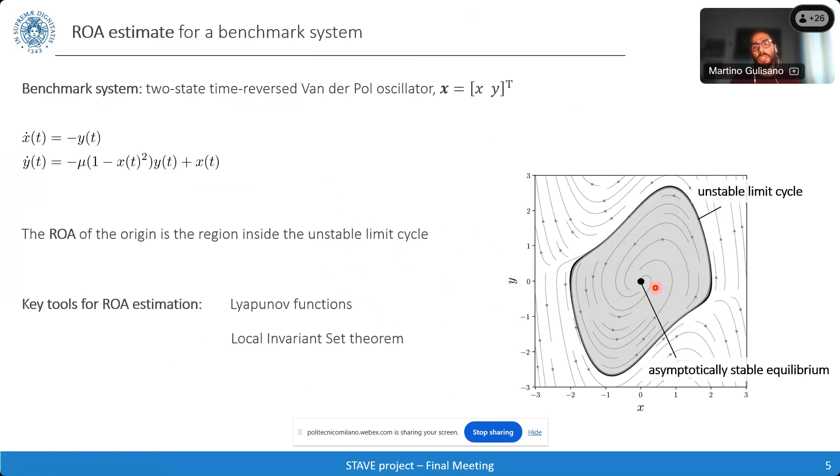So as we can see from the streamlines in this plot, trajectories starting inside the limit cycle converge to the origin, while trajectories starting outside the limit cycle diverge. And so this means that the gray region inside the limit cycle is actually the region of attraction of this benchmark system. We use two key tools to estimate the region of attraction for this benchmark system, and these are Lyapunov functions and the local invariance theorem.

So Lyapunov functions, I'll say just quickly, are energy-like functions whose values decrease along the system trajectories, and they are particularly useful to apply the local invariance theorem.

This second key tool adds two extra properties to the ones used to define a Lyapunov function, and the first is the existence of a Lyapunov level set, shown here as the red region on the right, that is fully contained in the region where the derivative of the Lyapunov function is negative. So this first requirement just says that this red Lyapunov level set is included within this purple region.

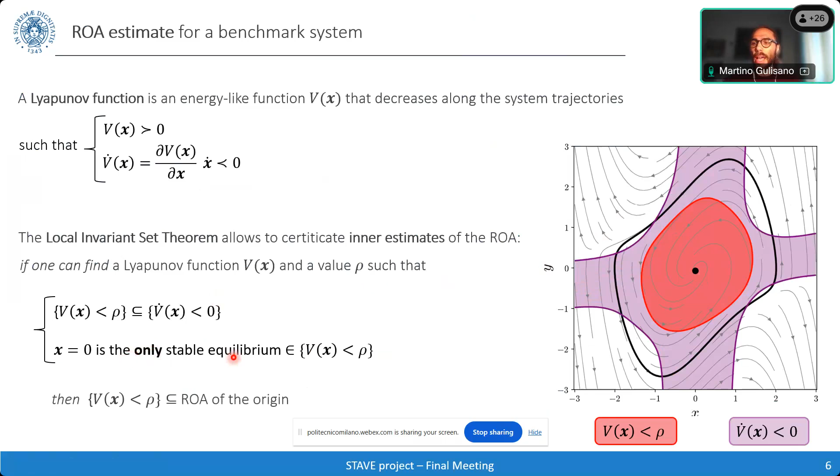And the second requirement for the local invariant set theorem is that the origin is the only stable equilibrium inside the red level set. So with all these constraints in mind, we can see that the constraint on the uniqueness of the equilibrium is trivial because we have just one equilibrium for the system, and all the other constraints may be recast just as positive definite constraints.

So constraint on the Lyapunov function V and on an auxiliary function L, which depends on the Lyapunov function and also on the system dynamics. For generic V and L, these constraints are quite difficult to check. The math behind is really hard.

But if V and L are polynomials, then it is sufficient to check or enforce that these polynomials are sum of squares. This means that they can be written as a sum of squared polynomials. Just a quick remark, for L to be polynomial, we also need the system dynamics to be polynomial because this x dot, the system dynamics, is inside the expression of the polynomial L.

So how do we check that a polynomial is sum of squares? This is very straightforward. We express the polynomial through its gram matrix representation, and this is a quadratic form built on a vector of monomials Z and on a symmetric matrix Q. And then we set up and solve a semi-definite program, or SDP, where the decision variables are the entries of the symmetric matrix Q, and the constraint is just that matrix Q has to be positive semidefinite.

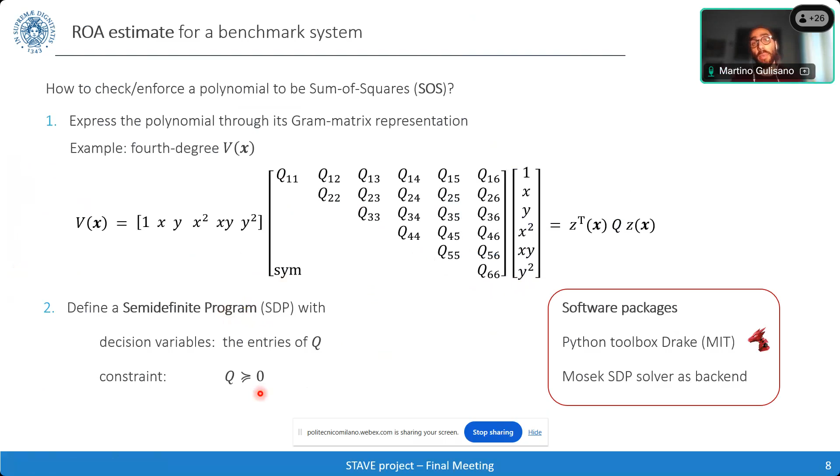There are several software packages to solve this kind of problem, to solve SDPs, and we use the Python toolbox Drake from MIT together with the Mosek solver as backend.

Okay, so with this tool we can find an invariant set, we can find a level set, we can find a Lyapunov function and a level set which is an inner estimate of the ROA, because all trajectories starting inside this red region will converge to the origin.

But the larger the invariant set, the better the ROA estimate, because we know that the gray region, all the region inside this black limit cycle, is the actual region of attraction. And so we set up an optimization problem.

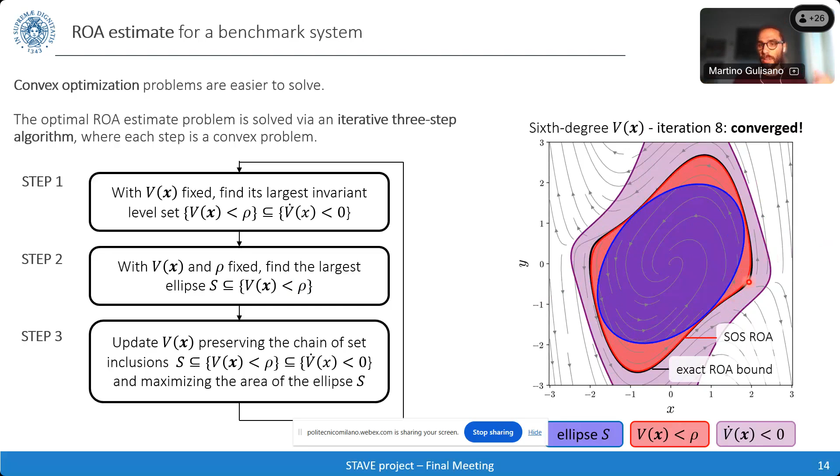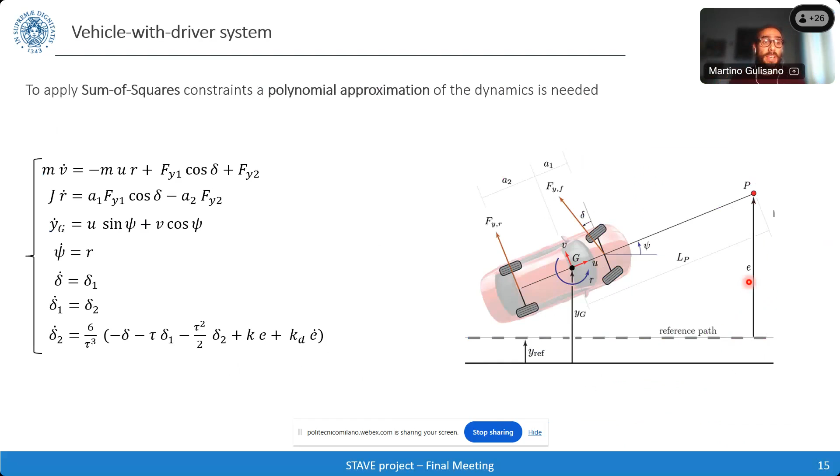So we have discussed the theory behind our procedure, and now we'll go back to the simple vehicle-driver system. You've already seen this set of equations before in the presentation of Professor Della Rossa, and we just need a little lifting to this system, because to apply sum of square constraints, this system needs to be polynomial, and this is clearly not, mainly because of the trigonometric functions of the steering angle delta and of the yaw angle.

For these we can safely use Taylor expansions around equilibrium, and this is a very good approximation, while the challenge is to approximate the lateral forces, the tire-ground lateral forces, the axle characteristics acting on the vehicle.

In this system, the lateral forces were originally described by magic formulas, and a peculiar feature of magic formulas is that they saturate. For larger values of axle slip angle, the lateral forces converge to an asymptotic value. But polynomials cannot describe saturation, so we cannot seek a global approximation for our system. We just look for a local approximation for the central part of the magic formulas.

Not just a linear approximation, it's still non-linear, a cubic one, but just on a central fitting range on slip angle. The bound of the fitting range corresponds to 95% of the peak lateral force, so 95% of saturation. From now on, we will just seek a subset of the region of attraction where this polynomial approximation of the magic formula is valid.

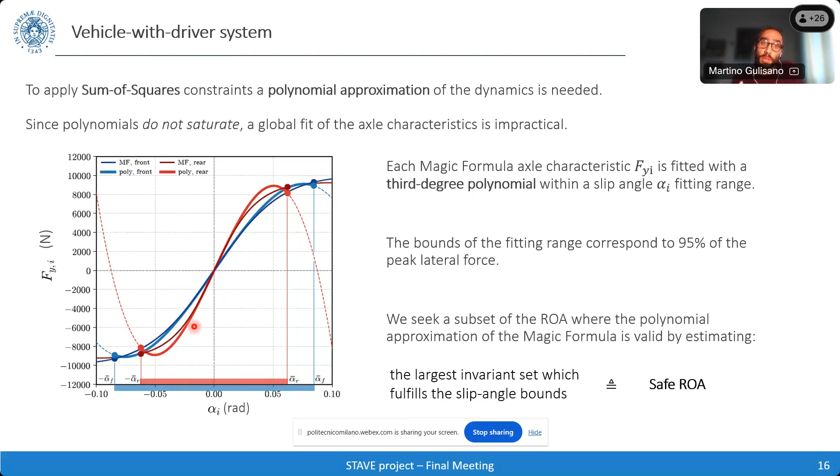We call this subset the safe region of attraction, because this is the region that we can safely certify with our polynomial approximation of the original non-linear full vehicle driver system. So what are the results of this procedure? Here the iterative three-step algorithm returns a 7-dimensional manifold, because we had a 7-state dynamic system.

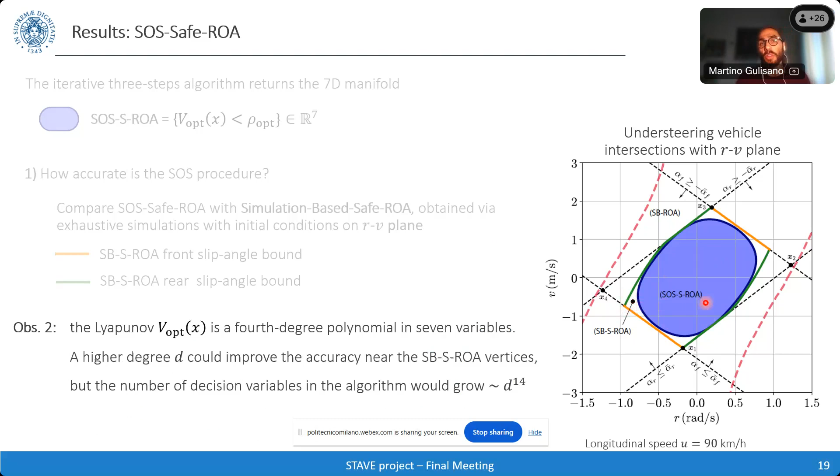As for the degree of the approximation, near these sharp features at the vertex of the ideal target region, we could improve the approximation by using a higher degree Lyapunov function. Here this is a fourth degree Lyapunov function, but this would cause the number of decision variables in the algorithm to explode, so it's not quite a good idea with the current formulation.

The second question we may ask is how restrictive was the domain of validity of the polynomial approximation, because we are imposing a restrictive hypothesis by constraining the axle slip angle. So we compared again the simulation safe ROA, the target we were aiming to approximate, with a simulation-based estimate of the full region of attraction, represented by these dashed red lines.

Here we see that the safe ROA is fully contained within the full ROA. This means that, in this case, these numbers and plots are relative to an understeering vehicle. The constraints on the slip angle prevent the system from reaching instability — we cannot reach instability if we do not saturate the axle, and we cannot go beyond the axle saturation because of the polynomial approximation. So this is the case for an understeering vehicle.

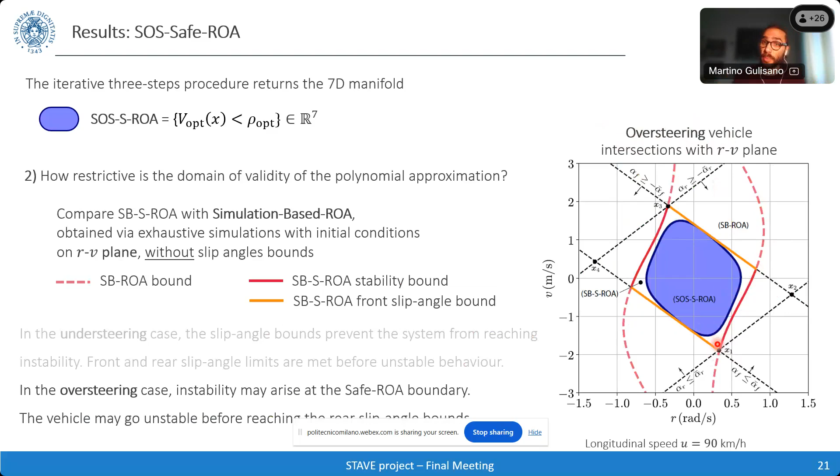On the other hand, if we look at results from an oversteering vehicle here on the right, we see that we no longer have the green lines referring to the vehicle hitting the rear slip angle bounds. Instead, the safe ROA and the full ROA, these dashed lines, share some boundaries on these solid red lines. This means our polynomial approximated system can describe instability along these boundaries, so we have lost something less for the oversteering vehicle, because the polynomial approximation can describe the vehicle going unstable, while the understeering case could not.

As a final highlight, I want to show some trajectories outside the r-v plane and the main plot. If we focus on the left plot, we have the yaw rate, lateral speed, and steering angle. On the right panel, we have the lateral position with respect to the reference path, and the yaw angle of the vehicle with respect to the reference path.

If we focus on the pink, orange, and red trajectories, we can see there are pairs of trajectories. The solid line is the full system, the original nonlinear system, the same that we have seen in the previous presentation, while the dashed lines are relative to our polynomial approximation.

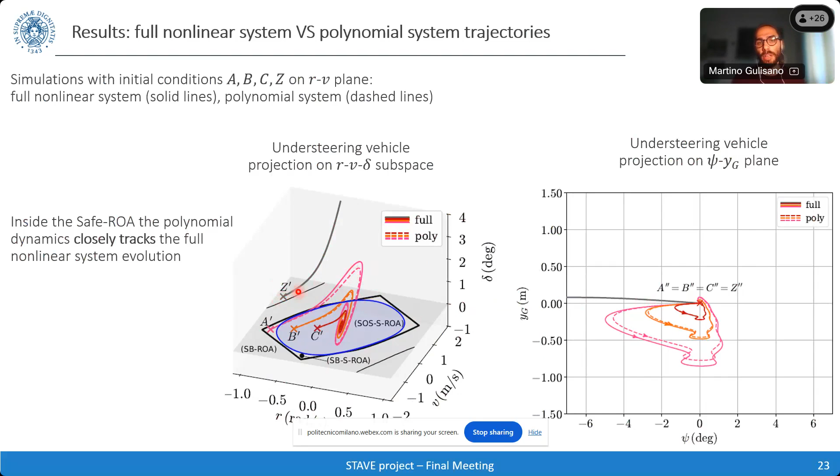As an example, if we start outside the ROA, we get this gray trajectory that simply diverges, as expected, because it is outside the region of attraction.

To summarize our findings, we developed a 3-step iterative algorithm for ROA estimates, and explained how to use a polynomial approximation strategy to apply the sum of squares method on this vehicle lateral dynamics system. We computed the sum of squares safe ROA as a 7-dimensional manifold, so we just have to find an optimal Lyapunov function, an optimal Lyapunov polynomial, and an optimal level set, and we can very quickly check the stability of a system just by evaluating this Lyapunov function at the current state.

We evaluate a polynomial, and if the value is below an optimal level value, we are safe. If it's above, we are unsafe, and the overall vehicle lateral dynamics system is doomed to instability.

For further work, we'd like to extend the polynomial fitting range, so the safe ROA would match more closely the full region of attraction. We'd also like to reformulate the problem to use a higher degree Lyapunov function, so it could be more flexible in approximating the exact region.